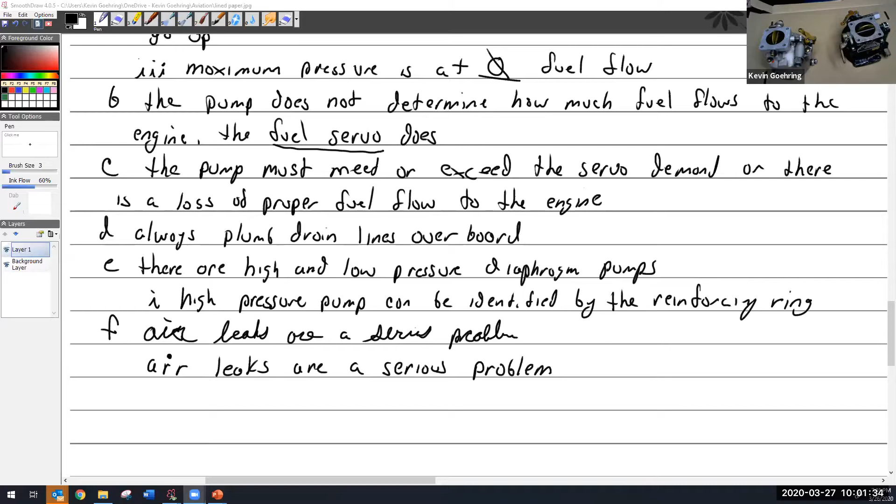So we'll go back to, let's see, speaker view. There we go. And then that went away. Now I'll bring it back over here. All right, so do you guys want to do this with these carburetors? Sure.

What are we doing? All right, same thing we did, but these are the Marvel Schebler carburetors. So I have two different ones here. I have the MA3A, and I think this is the MA3SPA. Yay, MA3SPA. So you can look at them. I'll put them going the same way, and you should be able to see what the difference is between the two of them. The diameter.

Actually, that's just an illusion, but good job. The wire. Whatever's off on the left side. Is that mixture control? That is the accelerator pump. Yeah. Let's take a look at that one, since that has more going on. The MA3A, the one I just moved aside, the air passages inside are a little bit different, but otherwise it's reasonably the same. But this one is interesting because it has the accelerator pump.

So one of the things Mark mentions is, hey, I'm used to seeing a spring. There's the spring. So if I let go, it spring loads to wide open throttle. And the reason why you would want wide open throttle is because if anything going to the throttle control in the cabin got disconnected, I'd rather have my aircraft go wide open throttle than go to an idle. I think that would be horrible.

So I can fly around at wide open throttle. That wouldn't bother me so much. And if I was coming in for a landing, once I knew I'd made the airport, I could turn off the engine. Kind of like a kill switch, where you turn it off and back on. It'd be hard on the engine, but I guess it's better than crashing somewhere.

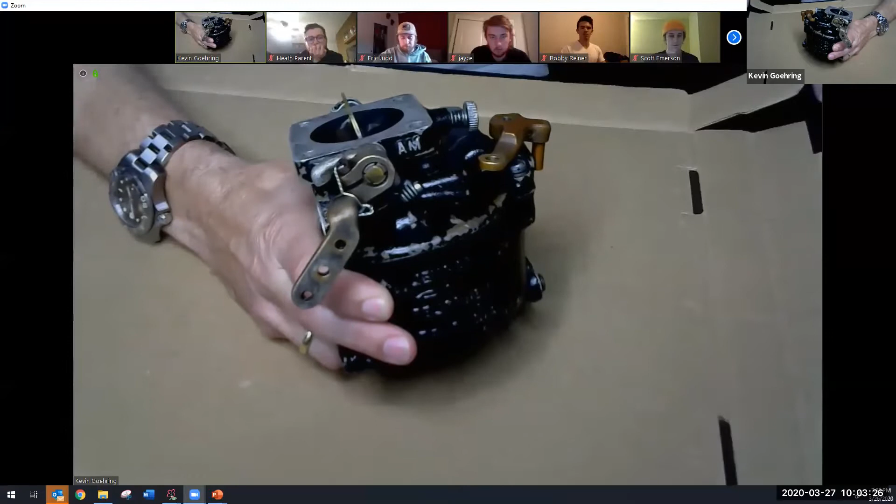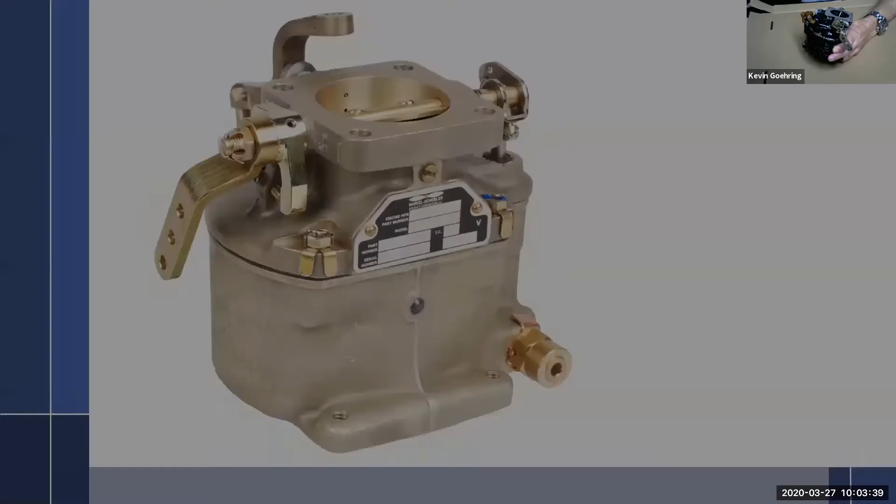I want you to notice the way that this shaft is. Remember I talked to you about the new style with the serrated shaft on it? Something I was just thinking about. Let me see. Move that back over here. Go full screen. All right, see how that has the serrations on it, and it's absolutely positively locked together. Yeah. Okay. This one does not have that.

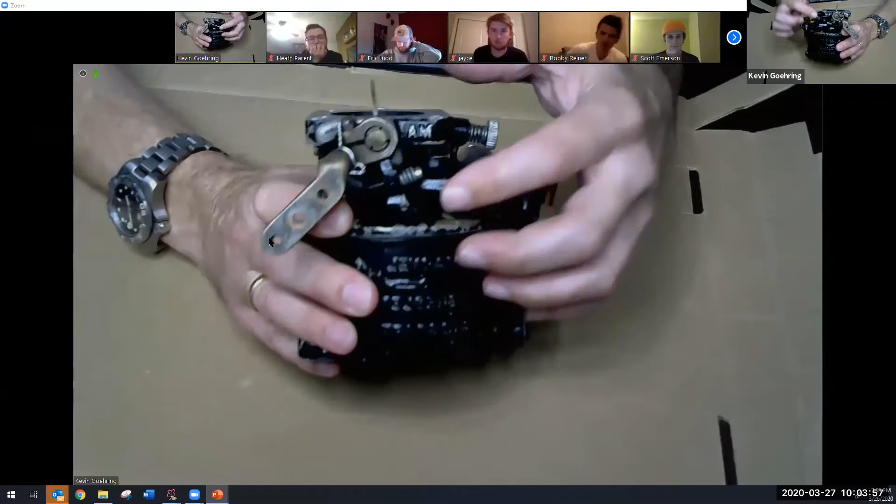This one just clamps down, and what was happening is this screw was coming loose, or the arm was coming loose from the shaft. So you can imagine if the throttle stayed in one place and you were moving this back and forth, and the throttle didn't move. That's what was happening. So they came up with an airworthiness directive that you had to wire them the way this is actually wired.

So notice that it goes around the screw, around the arm, through the screw, and then attaches to this piece here, which is separate, so that you've actually safety wired this arm on. So if the screw came loose, at least it would be safety wired to the secondary arm, which is pinned to this. So that was just an airworthiness directive they had.

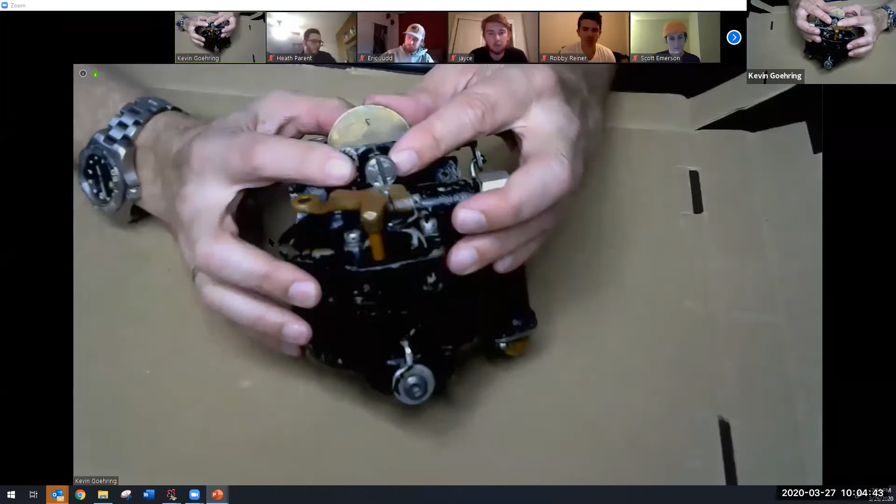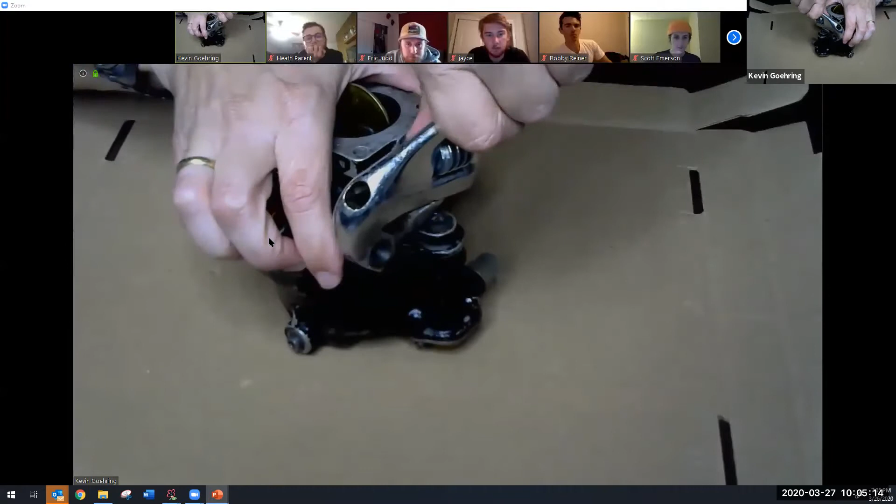I don't know if I can get this one out. Yes, I have a big crescent wrench. Actually, it's not a crescent wrench, it's an Olympia wrench. And I think it's too tight. Yep, too tight. I didn't think to do that one earlier.

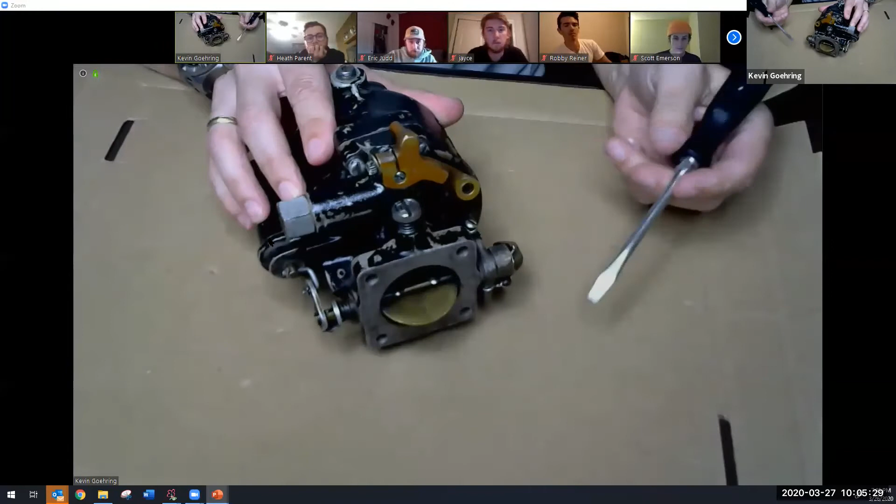Okay, and we have the idle stop screw right here. So that is just a stop that stops this from how far it closes. All right, let's take a look inside. So this one's a little more complicated.

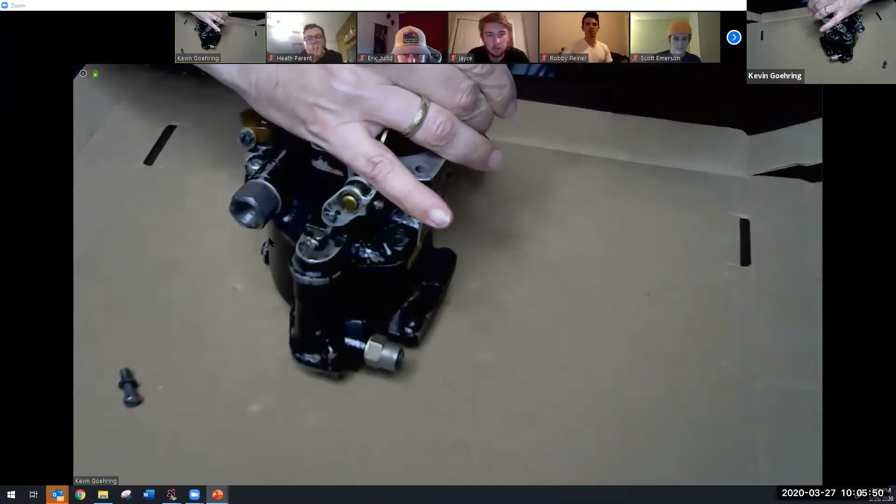Not sure why my dogs decide to lose their poo every night about this time. Actually, I do know. As the sun goes down, I usually go outside with Zeus and run with him. I don't run, I stand in one spot and he runs.

But this is our mixture control. Rich and lean, often says R and L down here too. Yep, R, L, which does not stand for right and left. All right, 4 screws, they come out. This just lifts right out.

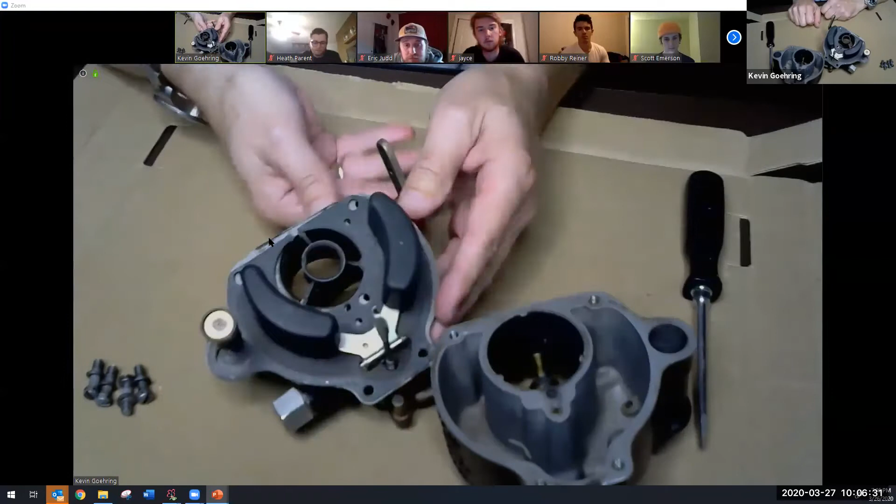And much different than the Stromberg, in that the Stromberg, we had all the float mechanism inside here, but now the float mechanism is attached to this. And the way you measure the floats on this is you just put it upside down and you measure the distance right here. And so it tells you to take a drill bit with the gasket in place and you measure it out near the edge and you measure that clearance right there. And if the clearance is not adequate, you bend the little tab up in here.

There's different styles now. This has a cotter pin that goes in a little tiny hole right there, but the cotter pin's already out. So I can just pull the pin out, and there we go. You can see the needle and seat, a whole lot smaller than the other one, that is for sure. And then the gasket will come out. Set that aside. So we have our float mechanism.

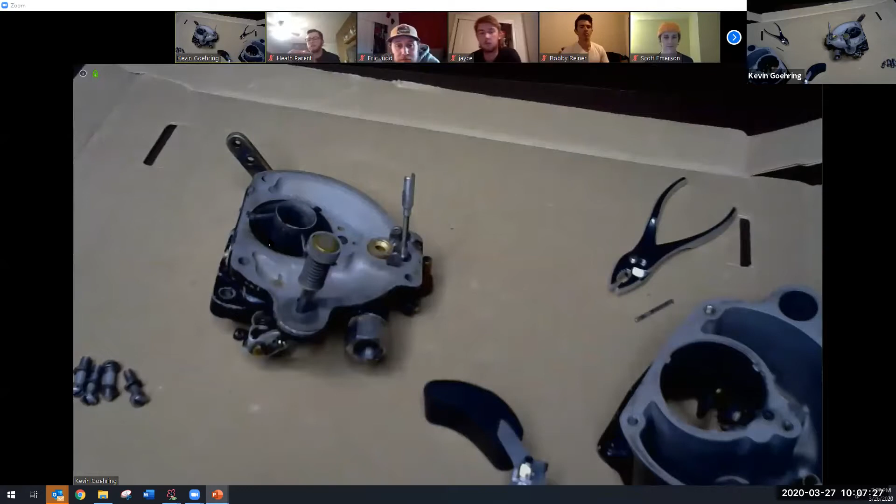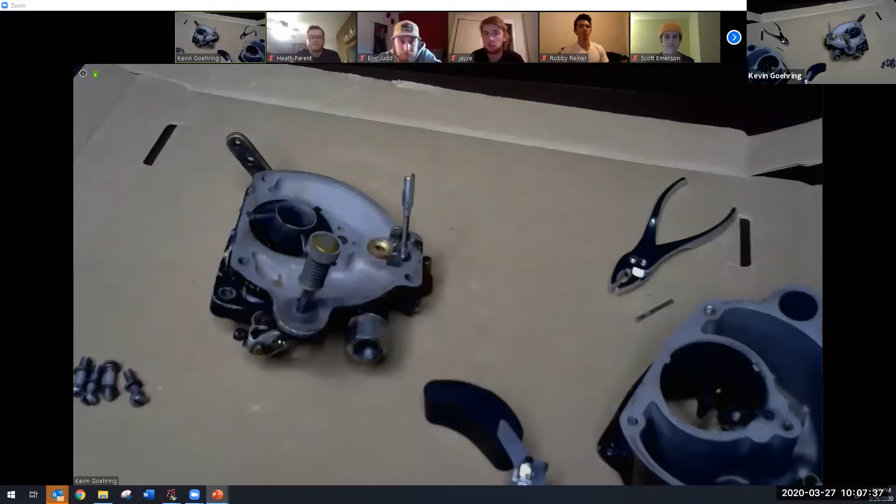I just realized something I managed to get from my office. I can find it. There we go. The floats. These are what the floats used to look like. They were brass. And these are really, really lightweight. They weigh almost nothing, but you can see how this one's already getting crushed. And one of these, I think, had some fluid in it, but these are the old brass style.

And then for a while they had this, the old composite style. These are just plastic composite. There's some reason they thought these weren't any good. And then they went to the brass and they thought, well, those aren't any good. So then they went to the plastic and they said, well, those aren't any good. So they went to the brass and they said, well, those aren't any good. And then they went to the composite that are blue. But I like this one here.

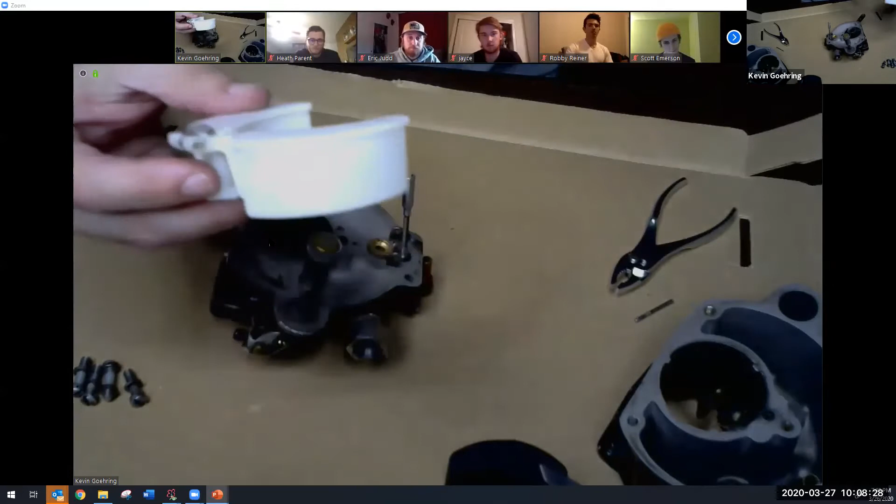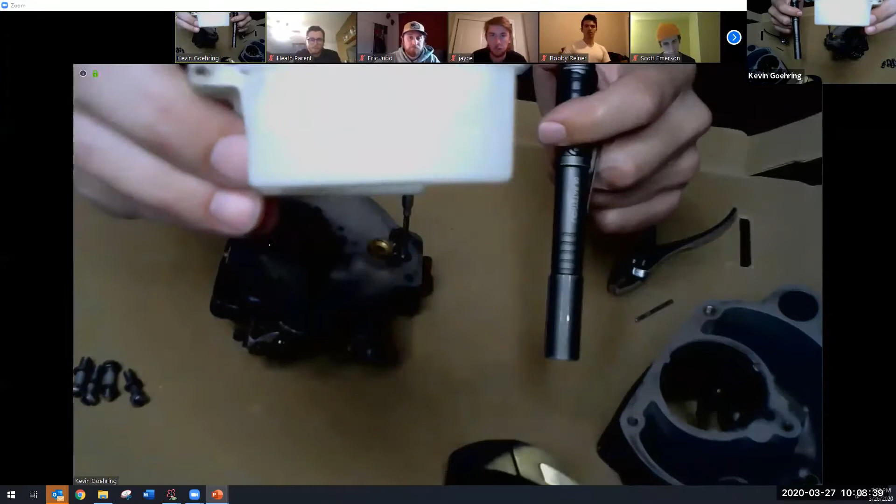I don't know if you can see this, but you can hear it. And where's my flashlight? The light above me is too bright, but you see there's something in there. That one's full of fuel. So it's got a hole in it and it filled full of fuel and it sank. So that's not good. So those are the old floats.

Let me see. We can take this out. Hey, here's the main discharge nozzle right here. These come out a little bit easier and they're more available. Oh, there we go. So if we wanted to do the same thing we did before and do a passageway and say, okay, how does everything flow through here? We could do the same thing.

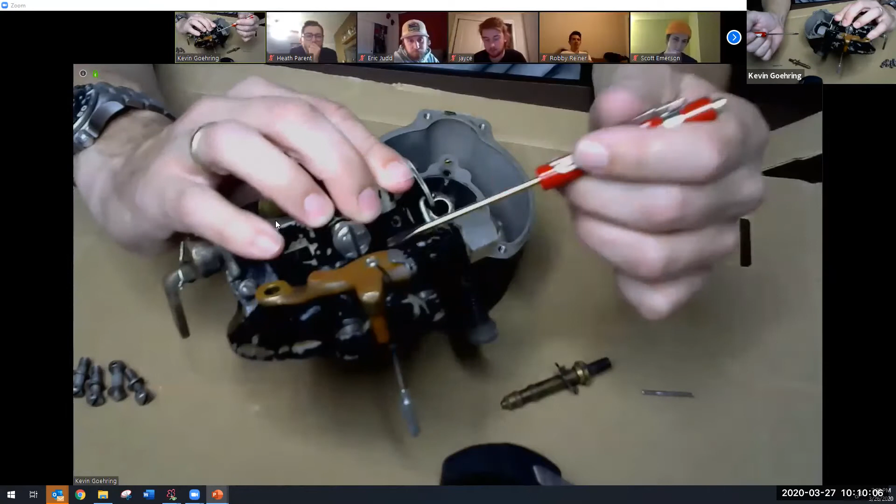So we would start with the fuel inlet. Fuel inlet is over here. So it goes fuel inlet through a screen, just like before. Check the screen every 100 hours or annual inspection. It's gonna come out of the needle seat, but it's upside down this time. And the needle's going to fit inside there, and I'm having a hard time getting enough room. So out of the needle seat, past the needle, it's going to fill up the bowl. And when the bowl fills up, the floats come up, shut off the fuel. Now we have fuel in the fuel bowl.

All right. So to get into the rest of the carburetor, it starts by going through this little passage right there. I don't think that I have one here that I can show you. I just have a box of stuff I didn't go through yet.

You know what that is? Needle. A plastic needle. That's the Delrin one out of the Stromberg, the old Strombergs. I told you it was a white plastic, so that's it, Delrin. Okay. I was hoping I had another one of these right here, but I don't.

So that right there is the valve that sits down in that seat down in there. So when you turn the mixture control, it's just going to turn the valve. And that valve is going to allow fuel to go down in or not. Boy, it's really dark down in there, and I don't think I can show it to you. Maybe.

That looks blurry to me. Yeah, I can still see the hole though. Okay, that hole. So the other three, they don't seem to do anything. They don't go together. All right, and they're behind. Those holes go behind the Venturi. Okay, so we solved those issues.

And we already know how the mixture works. We did talk about that, but now we can talk about the accelerator pump. So the accelerator pump, as I told you, it's on a spring. And now you can see how it actually works. So the way this works, it's solid to the throttle arm and throttle shaft, so it moves in conjunction with that. There's 3 holes for adjustment.

And the book explains to you how if you want more fuel per opening, you pick another one of these holes. I believe this is the medium, and I can't remember if this is the low and that's the high or high-low. I always look in the book. So those connect the medium-sized hole. Never mind, I see. Okay, so it moves like that.

All right, so this obviously goes into here. I picked one with a decent packing on it, but even so, this packing is pretty dead. Normally it's a very tight seal in there. This is not a tight seal. So that's going to go in there. And so when I am at full throttle, it has already pushed the fuel out.

So when I back off to idle, it's going to pull up, and in here it is going to want to suck fuel. So it does. It sucks fuel through this little hole. It's like working in a mirror. Through this little hole right here. And that hole goes through this mechanism where there's a little check valve in there. So it goes through that hole, fills up inside of here, through that little check valve.

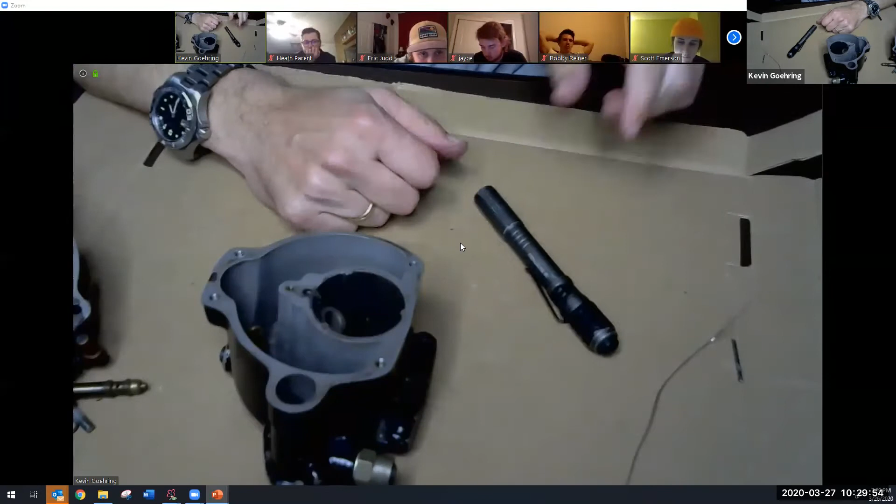And then when I accelerate, it will plunge down. Flashlight. It will go out through this check valve, through a passage that you can't see too well, into this tube right here. And then that tube right there will squirt you in the eye. And that's what the purpose of that is for. And that is really all there is to that. So pretty simple, huh? Pretty much. Simple.

Oops. We'll do that. All right, so what did we just talk about? We were doing the idle system, right? So fuel, we said, comes through the screen, past the needle and seat, fills up the float bowl. From the float bowl, it goes through the metering assembly, the mixture metering valve sleeve, up through the main metering jet, into this area where there's one set of threads here and one here. So this is the middle thread section here, unthreaded.

Out those holes, up the idle metering tube. And I said, well, wait a minute, we got to get air from somewhere. Remember, this is an MA4, so it might be a little different. Oh, there it is, right there. That uncolored tube, I forgot to color it, is the one that's drilled backwards. So remember, I said the screen was right here. And so that comes right through there, mixes with air. There's the little orifice right there that you can see.

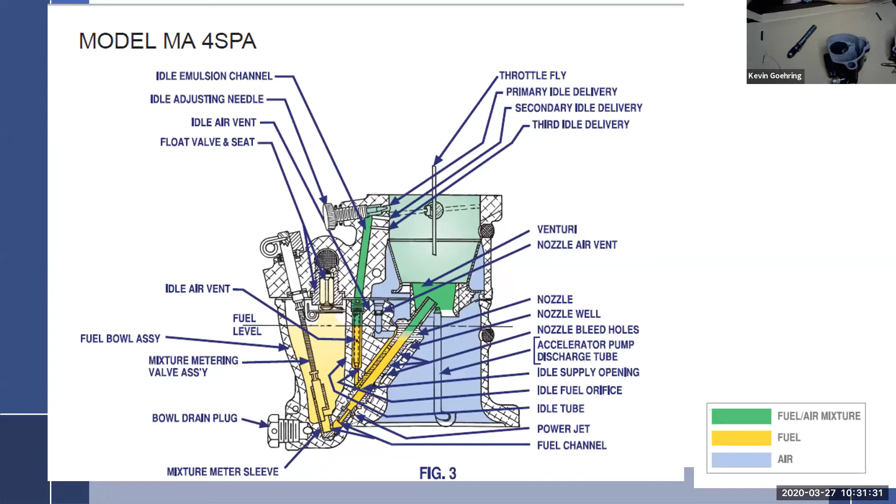Switches to the top half, drilled in, and we had 1, 2, 3, 4. This only has 3 deliveries. So this one has primary, secondary, and tertiary idle delivery. We had a 4th one. And so when the throttle is this way, remember everything above it is delivering fuel, everything below it is probably going to work as an additional air bleed. This one doesn't say that, but we kind of know that's what's happening. And I think that was all we have on this one because it doesn't show the accelerator pump.

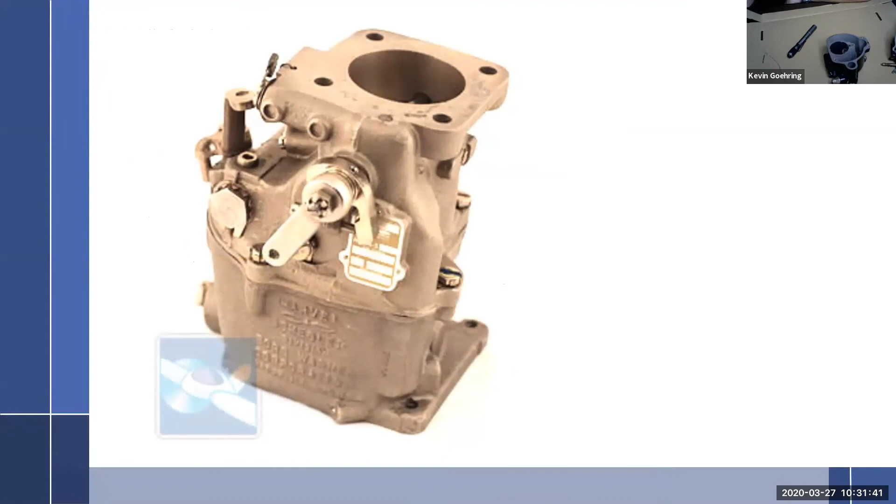That's the big one. Kevin? Yeah, this one has a screen for the fuel. It sure does. Let me get out of here. It is right behind here. So if I pull this out, it's going to be in there. Oh, is it? It was really tight and I couldn't get it. Some of them are missing. No, this one's in there. It's a long screen. It's a long finger strainer, goes all the way back in here.

Okay. All right, questions on that one? I think it's pretty interesting how in the camera you can see the staining on the inside of the Venturi and where the 4 holes are. You can kind of see the airflow going. Well, you can see it real well. If you're sitting here, it's very obvious that, yes, you can see the fuel staining, the cleaning.

Oops. Put together right. I guess we should put together right. And I feel like this helped so much. This helped a lot to understand, to solidify all of the ideas you talked about. I think you're just saying that so you don't have to write notes. I'm not done. No, I see some head nods over there. What, about the notes? Yes, no more notes. All right. About the ideas.

What do we got? 732 there. So this, it just sits here. That's why I said they actually had problems with them. They come out. This one was actually giving me problems getting loose. So I was trying to put it together. So the hard part of all this, number one, is to remember that if you pull a screen out like that, you ought to put it back in. So I guess that's a hard part, number one. Screen back.

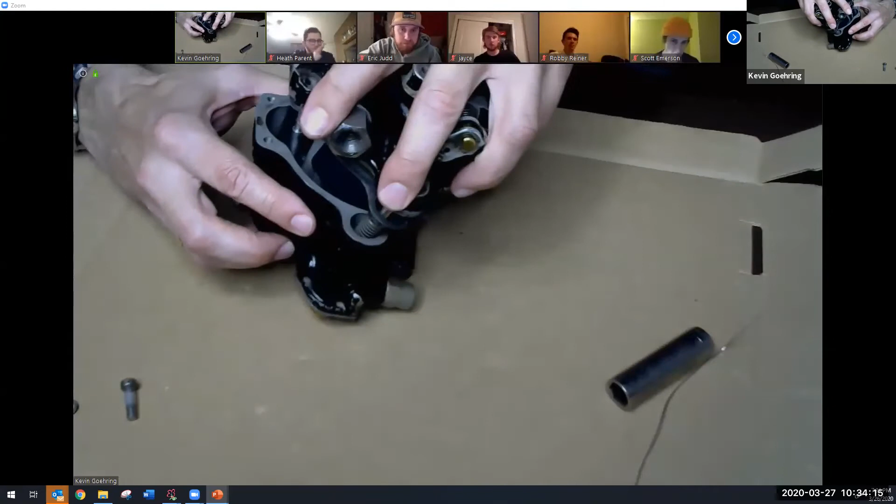Like, for instance, how that little jet has to sit inside of the Venturi and not outside. You have to know to be careful with this and lubricate it when you put it in. And most importantly, you have to make sure that this mixture sleeve actually makes it down in there. So it's not the easiest thing in the world. You have to get it started, but once it's in there, boom, it's in there. And that's not a big deal. Like I said, you can now blow in it and move this back and forth, and you'll hear a little bit of a tone change sometimes.

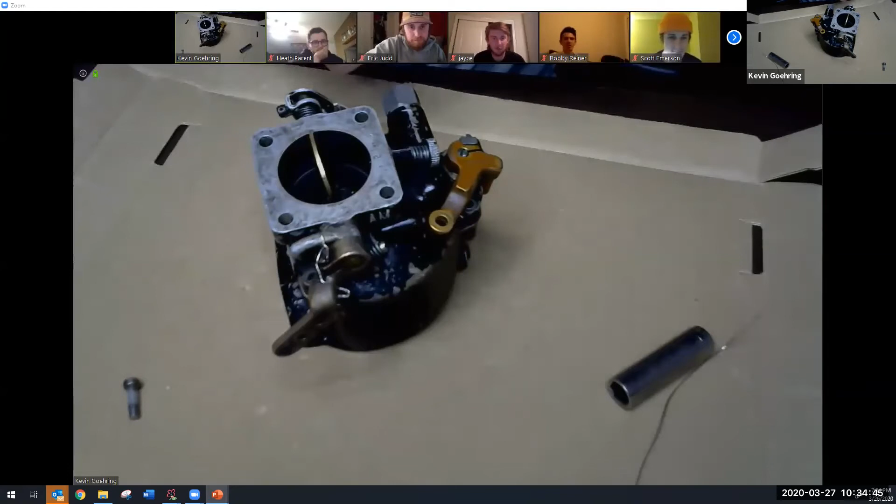But this is all something that every one of you has the ability to just take something like this apart and just sit with it with a piece of safety wire, sometimes I'll use shop air, a flashlight, and just start thinking about it. So once you have the basics, it's not that big of a deal to figure this stuff out. Although, can't get the dang screw in. There we go. I don't want to leave it all apart across my desk and lose all the pieces.

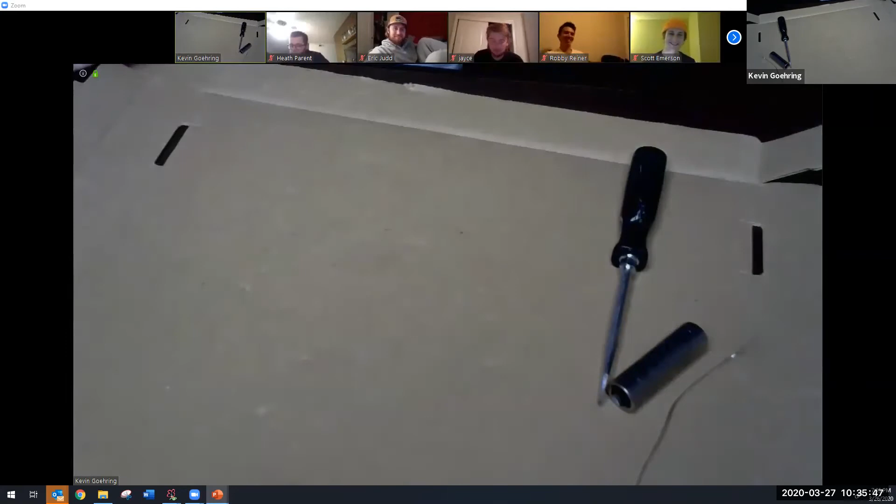This is the MA4-5. So this right here would be on up to the 172, although this doesn't have the accelerators. This is probably the one that Harry has on his airplane. So you can see that is significantly bigger. Get it in there. So this is more like for an O-470. So this one, I'm not going to do. I haven't taken one of these apart in many years, but I'll get a video going on this one because it's actually rather interesting. A lot is different about it.

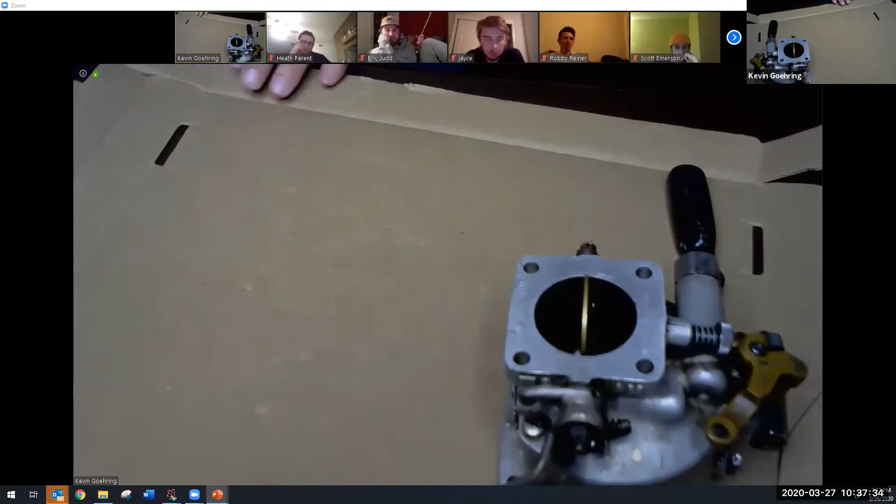One of the things that's very different is it does have a needle up in here that is actuated by the actual throttle arm, which varies the pressure on the float, which affects if it's rich or lean. And that thing's kind of a booger to set unless you have a special tool. That used to be a project at school, and it was like this horrific 2-hour ordeal. If you have the special tool, it says insert the tool, screw it all the way in and then back it out 4 turns. And if you don't have it, you have to take like 16 different measurements, do some math, do something else. Are you kidding me? We have the tool. So, all right. So this one here is just the MA3A.

A lot more simplistic just in the fact that it doesn't have the accelerator pump. So what kind of accelerating system do you suppose it has? Well, there you go. Now, if we looked at the Stromberg, the first one we did, I don't really see much of an economizer system unless you want to, like we talked about, account for the fact that the vent tube is in the throttle area. So it vents from the throttle area, and you can see how that might act as some sort of economizer system.

This particular one we just looked at a minute ago, the MA3SPA, I cannot identify any sort of accelerator system, economizer system on it at all, economizer or power enrichment. I just can't. What about the venting to the float? The venting to the float happened behind the Venturi, so there'd be no change ever. Okay, got you.

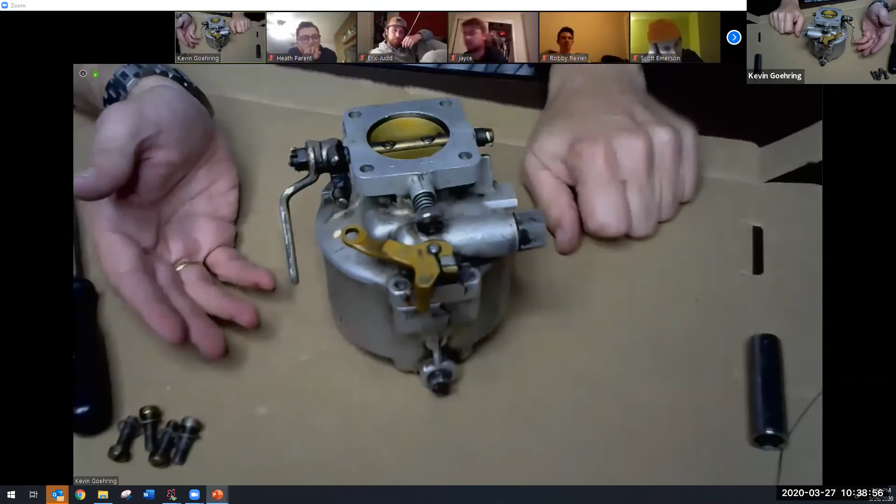So this one I remember being a little bit different. Everything about this is really the same as what we just looked at. The only difference from the outside is it doesn't have the accelerator on it. So we're going to assume that it has an accelerator well, which it kind of does. All right. So everything else, same. We measure the floats the same way, come apart the same way.

And everything in here looks exactly the same as the other one. It just doesn't have, again, the accelerator on it. And that's really about the difference. But we can start looking at some of the air passages, which of course are very difficult for you guys to do. It is this one.

By the way, do you know the difference between a Snap-on and a Craftsman socket? Besides the price. There's a reason why I have a Snap-on and a Craftsman here. The Craftsman are better for carburetors. The flutes, if you will, the flats go all the way down to the end. Snap-on doesn't? It goes in about 1/2 inch. So like for the Stromberg I was just working on, you have to have a Craftsman. That's why I have that one. So Snap-on doesn't come with the flutes all the way down? Nope, doesn't.

All right, so main discharge nozzle, looking the same. Main metering jet. This is the passageway off to the idle system. Here's the air bleeds. That's all the same. So we could go through this all over again and we're pretty much going to get the same thing. I can tell you the fuel system on this is identical to the fuel system on the other one. Where things are going to get a little bit different is the air system on this one. Flashlight, here we go. All right, let me see if I can find what I want to show you in here.

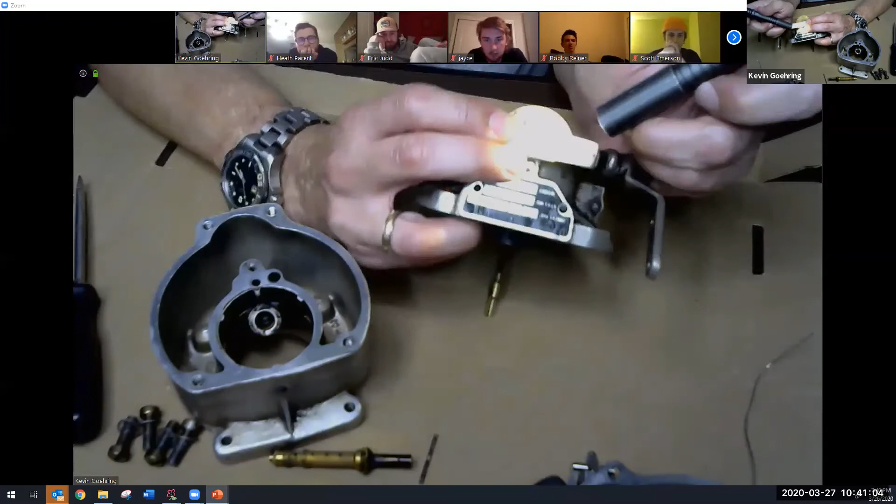See this right here? While I'm thinking about it. Is that a lead plug? That is a lead plug. This one has the lead plug removed and it has this attached to it. This is the carburetor air temperature bulb to tell you if you're about to have a freezing condition. So some of them have a lead plug. Some of them are actually drilled out.

Let me see. Maybe I'm just going to be lying to you guys today. Maybe this one doesn't have what I wanted. We'll see where this ends up. Okay, oh yeah, this one does. So again, now we've got these holes here, but we're going to have to match them up. On the other one, this was blanked off. There was nothing here. And so if we take what we've already learned, line them up this way. This forward one here lines up with a, let's see if I can make it work out.

That one on the other carburetor was drilled right inside of here to the back side of the Venturi. Well, now I don't have anything on the back side of the Venturi. In fact, if I look around in there, I don't see a single hole down in there. Kind of peculiar, but there it is. So I've got to find a place where I'm going to get air. It was out of here before, now it's not. So looking down in here, you can see that? It's cross drilled. You can see the light coming out of there.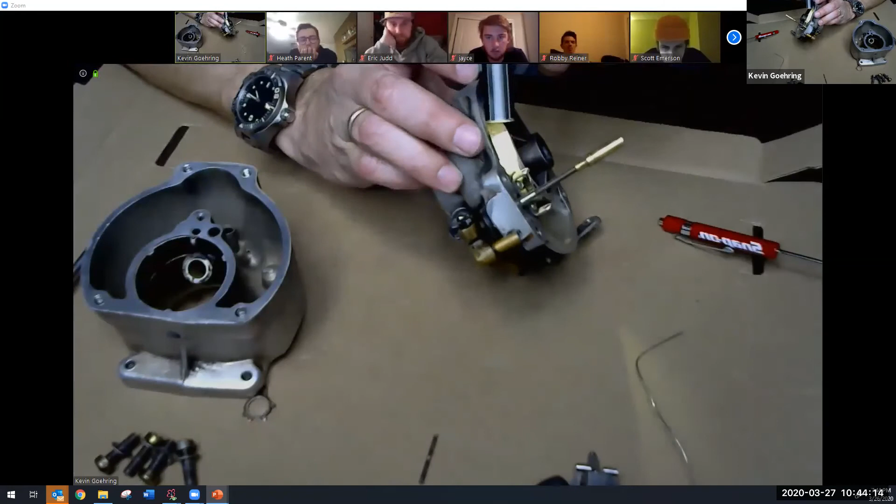And if I remember correctly, this goes down this one to a little brass plug. So far I'm not seeing any way around here where air is getting into here. I don't have any holes here. I don't have any holes back here, just this one here with cross drilled down. But I did find something kind of interesting.

If I look down in here, boy, it's hard for me to show you guys. I've got, oh, there we go. 1, 2, 3 holes. What are those holes for? Idle circuit. Idle circuit. There we go. We know it's idle circuit. You see a 4th hole offset?

Yeah. Okay. That 4th hole, right, let me see. Right down there, that offsets to this one right here, straight down. Those 2 match up. And on the other side of that is that hole that I was talking about. So I can't actually put anything through to go through that. It's just too far away.

But I believe those are completely interconnected. I can't prove it right now. I think I have before. We just need some fluid or something. So I do in fact have air through that 4th hole. I'm going to turn it around so you guys can see it. So when am I going to see that 4th hole? Right now, that 4th hole is hidden. So if that 4th hole is hidden way down below, and remember, this is where the fuel and air come out towards you guys right there.